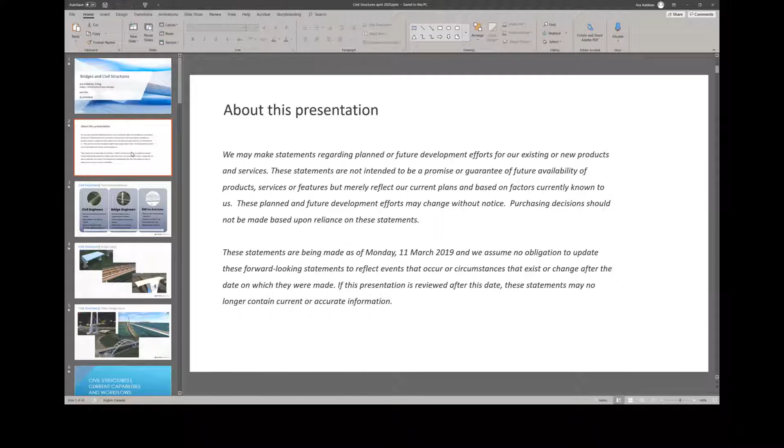Again, in summary, what is the big objective of the workflow? It's to allow civil engineers and bridge engineers and the BIM technicians to all work together. So if you have questions, feel free to ask them, and we'll try to manage our time as we go along. So I'm just going to jump in and look at this workflow in general.

Okay, and then the second video is to look at the same workflow on a slightly larger scale. And the third video is to walk through what's coming up in the August release next month, which is of particular interest on the bridge engineers' side that we see in the middle here.

Laura, before I jump in, is my audio coming out clearly enough? Yep, you sound great. Okay, so let me go in here. And just confirming that you see a video screen that says the civil structure workflow. Is that what you're seeing? No. You have to share your whole desktop instead of just the application. Okay, yeah, I just had to double check. So let me go back to share. I don't usually. Okay, now we should see it, hopefully. Yes. Perfect. Were you seeing my PowerPoint before? Yes. Okay, all right, so it was just a question of sharing the screen more generally.

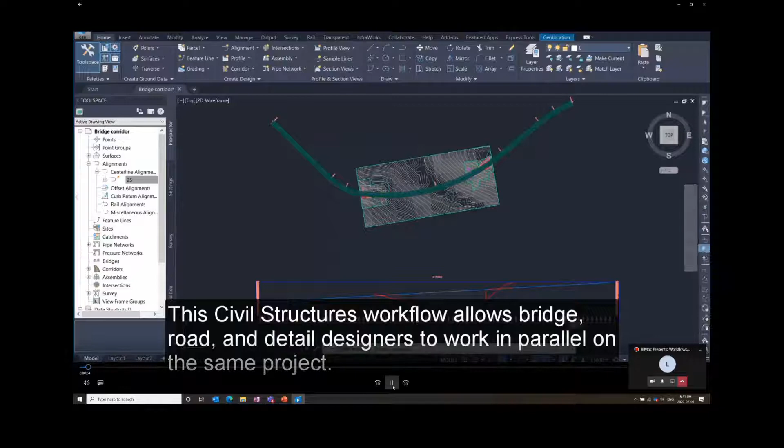So here, imagine you're working on this project and the road design team is using Civil 3D and creating, in this case, a horizontal and vertical alignment and really a corridor for this project. And now the second team gets involved, which would be the bridge design team. And in InfraWorks, you can create a site model pretty quickly using Model Builder or ArcGIS data.

So you can bring in terrain, topography, aerial imagery. You can bring in point clouds, other GIS information to provide as much context as possible for the development of the bridge design from early design towards detailed design.

So in this case, we created a starting model, and while we could also use InfraWorks to model some of the road geometry, in many cases, especially if the intent is to go to detailed design, our clients will be using Civil 3D. And we've been really working on making that integration between InfraWorks and Civil 3D much stronger. So in this case, the bridge design team is going to basically bring in the Civil 3D drawing that is going to serve as the basis for the bridge alignment.

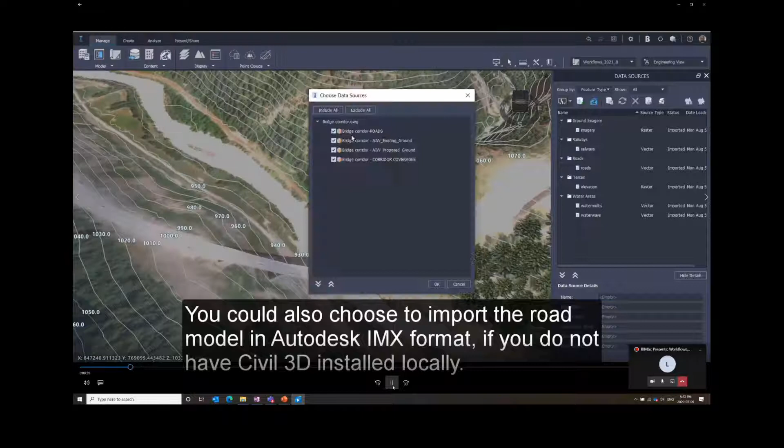So we can go in and bring a data source. InfraWorks allows quite a number of different data sources to come in, raster imagery and point clouds, etc. Now I'm bringing in the Civil 3D drawing that we saw a moment ago. And because we already have the terrain in this model, I'm just going to bring in the road design model from that drawing. And when you bring it in, you can configure it.

Now, what's new as of this April is in the past, we could bring in the alignment, vertical, horizontal. Now we can also bring in the full corridor. So if you have a complex corridor, a detailed custom super elevation, whatever the case may be, you can bring the corridor in. Now, when you bring it in, you can decide whether you want to use a corridor or simply use the horizontal vertical alignment and use a parametric road model from InfraWorks.

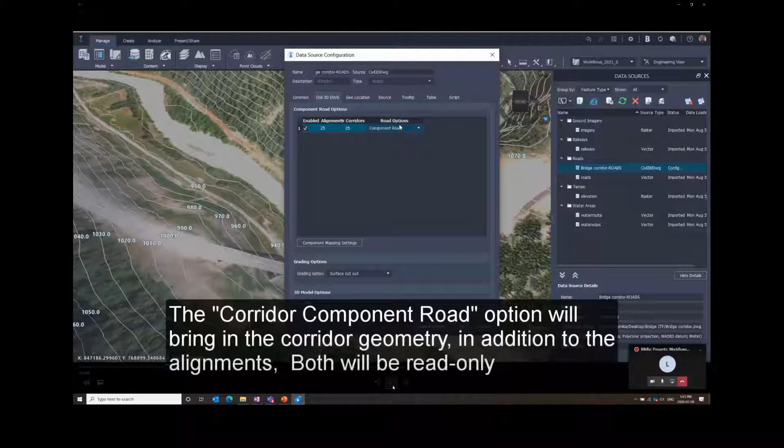So a typical scenario would be that the road design is still evolving and you're going to bring in the alignment geometry. And later on, when the road design team is further along in design, you might switch it over to the custom corridor model. So in this example, let's use the alignment and then we'll switch to a corridor later on. We've been working to make sure that it's fully compatible. I think in the August release, 95% plus of all corridor models from Civil 3D can be brought into InfraWorks.

So now this is the new starting point. The bridge design team now has this road geometry. Again, this is the horizontal vertical alignment and the parametric road from InfraWorks, which defines the lanes and shoulders, barriers, etc. And now the bridge design team can leverage InfraWorks, which is kind of in-context modeling. What that means is you can add the bridges directly to your 3D model, place the foundations and abutments based on constraints that you see, etc.

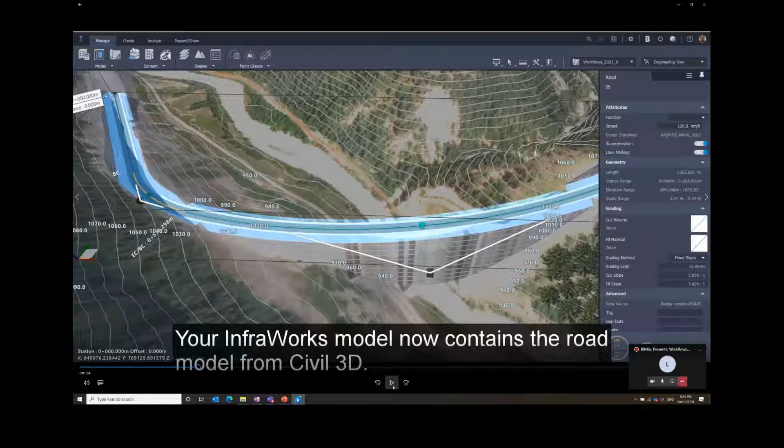In context. So to place a bridge, you would go into the bridge tool and place it anywhere along. You can be very explicit with the exact stations or approximate and modify them later. It really doesn't matter, everything being parametric. The first thing you'll notice, of course, is when you place a bridge, that a bridge is created automatically. So you don't start from scratch and model every pile and foundation and pier. You start with a default bridge and you modify it.

So in this case, I'm kind of mimicking what the Kicking Horse Bridge has. It has 5 piers. So the asset card on the right will expose a bunch of parameters, as will all the bridge components. So I'm going to change the number of piers from 11 to 5 and move on. And then we can go in and change every parameter of this bridge. Click on a pier, change its column dimensions, or click on the foundation and change its pile design, layout, etc.

What we also introduced a little while ago is the ability to right-click on the bridge and automatically create a fully formatted spreadsheet with all the bridge parameters. So especially on a complex bridge or a long bridge, you have access to all the parameters in an organized way. So in this case, a simple example is while we now have 5 piers, I might want to move them each to a very specific offset. So I want to have 70-meter initial spans, then 80-meter spans, followed by an end span of 54 meters. I could go in and click on each pier and modify them.

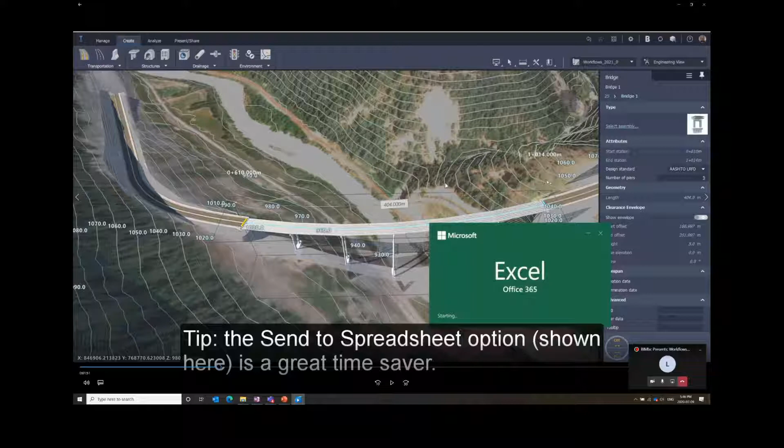But just to illustrate the spreadsheet concept, we're going to right-click on a bridge, and here you can see all the worksheets. So every pier with the same kind of Inventor model for its parametrics would be in the same worksheet. And here I'm just typing in a simple little formula to space the piers at exact stations that I want.

And you could do that for really any parameter in the bridge. Save the spreadsheet and just open the spreadsheet or update the bridge from the spreadsheet in InfraWorks. Now you'll see the 70-meter spans, et cetera, that we added. From there on, you're going to parametrically model or modify the bridge. We don't want 70-meter pre-stressed concrete girder spans.

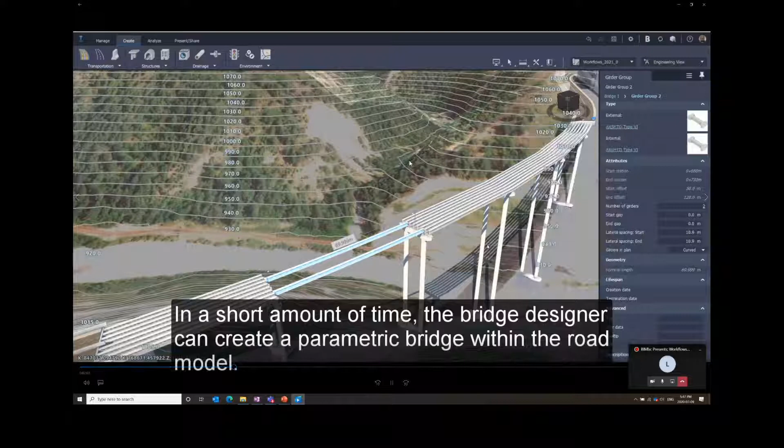So let's go in and select a span and change the number of girders, set it to be curved in plan. In this case, unlike the actual Kicking Horse, which is 6 plate girders, 4 plate girders and substringers, I'm going to go with 2 composite box girders that are curved in plan. So I'm just going to pick from the library 2 composite girders. And every one of these objects will expose their own unique parameters.

In this case, we can see when we select once more in the girder group, we could modify the top flange, bottom flange. We could also modify at any location along the span with these blue slices you see. So you have quite a bit of control, and it's almost real time. So here in a few minutes, you're modifying the superstructure, applying it to the adjacent spans, and then moving on to, let's say, the pier.

The 2-column bent of some 100 meters in height might not be appropriate. So I created a custom pier. All the parametrics leverage Inventor, Autodesk's solid modeler. That really allows us to go quite far with the parametric models in a robust way.

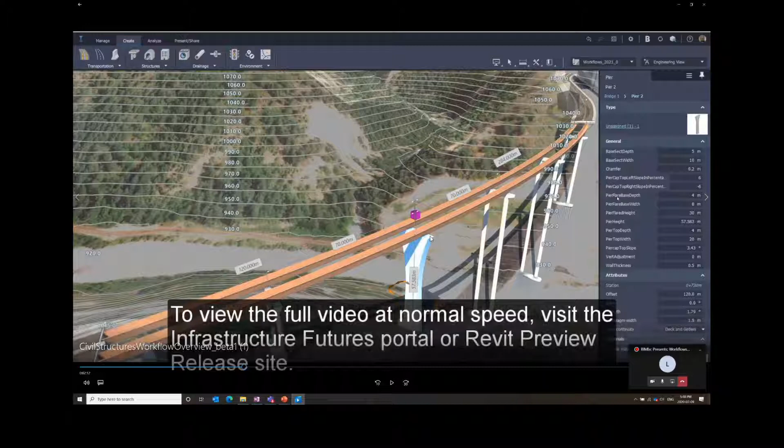So here I selected a pier which is a bit more like the actual pier, a flared pier. I can change its own parameters. Again, every component might have its own unique parameters, and quickly apply it to the adjacent piers. And in a few minutes, the bridge design team might have a starting model. And now you might do some analysis, et cetera.

When you're ready, and only when the bridge team is ready, would they want to publish this bridge. And why would you publish it? You might want to start doing all the technical documentation in Revit, adding rebar, et cetera. Or you might want to bring it back into Civil 3D to rework some of the grading or show the bridge in a long profile view. So at this stage, when the bridge design team is ready, they can publish the civil structure.

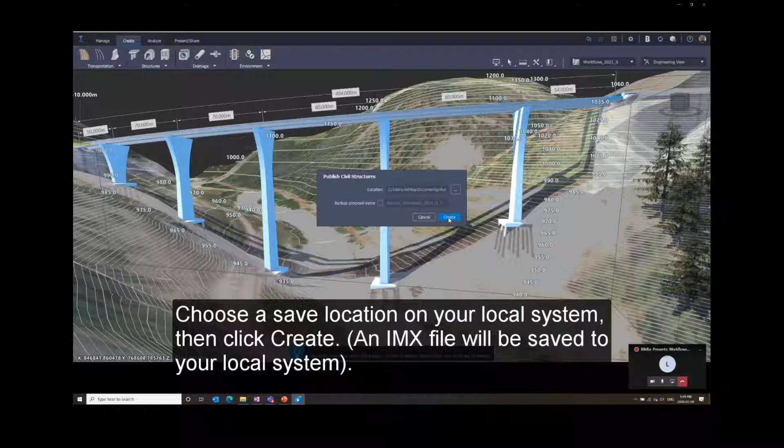And here you could publish it. You could work locally on your computer. You could publish it to your company network, your LAN, or you could publish it to Autodesk BIM 360, which is our cloud collaboration system. Any one of those approaches are available. So here I'm just going to publish it locally for this example. And once published, I can go in Civil 3D or in Revit and just open up this bridge.

So again, at the moment we have the road design team and bridge design team. Maybe we have a third team that's going to do all the detailed work in Revit, add the rebar, and do the construction sheets and schedules. To model this bridge in Revit directly, it wouldn't be that simple. In this workflow, you just create your Revit model in your normal way, pick your template the way you want it, decide whether you're using Revit collaboration, work sharing, etc., and then go in and choose to import what we just published. So we've been working very closely with the Civil 3D and Revit teams as well.

So we've introduced in the latest version of Revit a discipline called infrastructure. So this is beyond architecture and MEP. Now you have infrastructure, and we added a new set of categories for bridges. This is going to evolve with rail and other infrastructure disciplines in the near future. But in the past, if you were in Revit, you would pick the most suitable building category for your bridge. You might call a pier a column, and an abutment a wall, because you had to pick what was available in categories, Revit being category driven.

We have a question. Yes. Sorry, I didn't catch it quick enough, but the question is: is there allowance for Autodesk Fusion 360, or is it only Inventor? At the moment, it's Inventor. Fusion 360 doesn't quite have the architecture to do programmable parametrics remotely that Inventor has. Inventor has what we call Inventor Server.

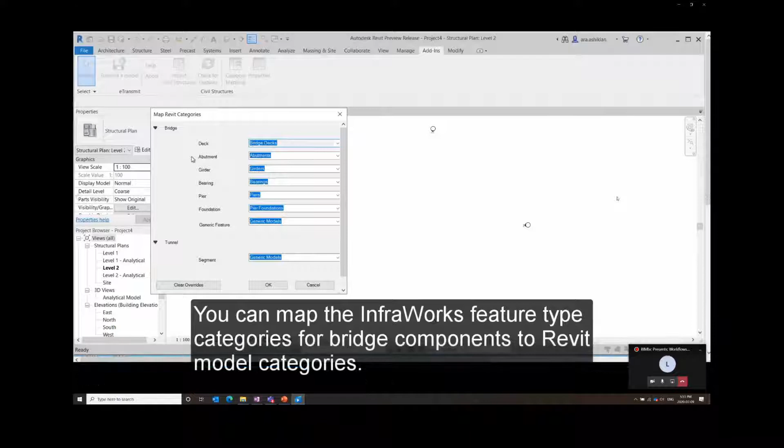Okay, thanks. So here, we'll get back to this a bit later. So you have proper categories, and we looked at IFC and Revit and came up with categories that make sense for civil structures, bridges to begin with. And when you're ready, just import what we published. We published that bridge from InfraWorks, and you just bring it in. And in a few minutes, you have the bridge.

And now, of course, you have three teams working side by side: the road team, the bridge team, and the technical documentation. In some companies, on some projects, it might be one team. In large-scale joint ventures, it might be different teams across different companies. So the workflow has to accommodate all those considerations.

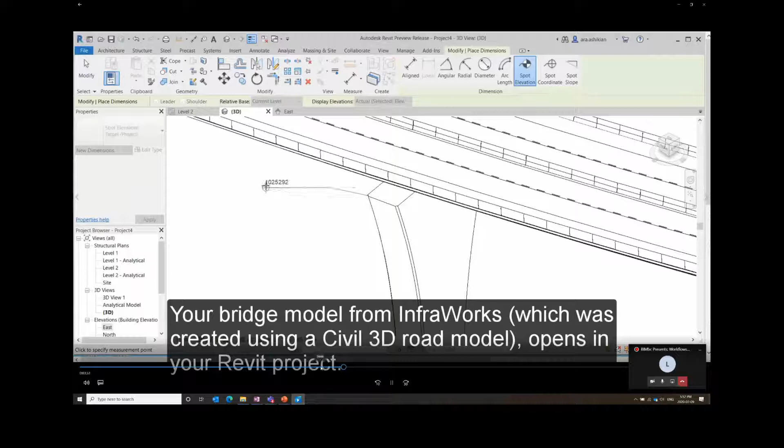So here again, you might start doing rebar and sheets and schedules. In this example, I'm just putting in some spot elevations just to get the ball rolling in Revit, and then we'll continue with kind of the cross-product workflow. So here, again, these piers are almost 100 meters tall in this bridge. It's hard to get that sense from just the graphics, but they're very tall piers.

And here we can also go, as I mentioned, directly in Civil 3D. So the road design team could bring in the published bridge directly into Civil 3D. So we can go in and import that bridge exactly in the same way, or in a similar way. So we're going in and bringing in the published bridge.

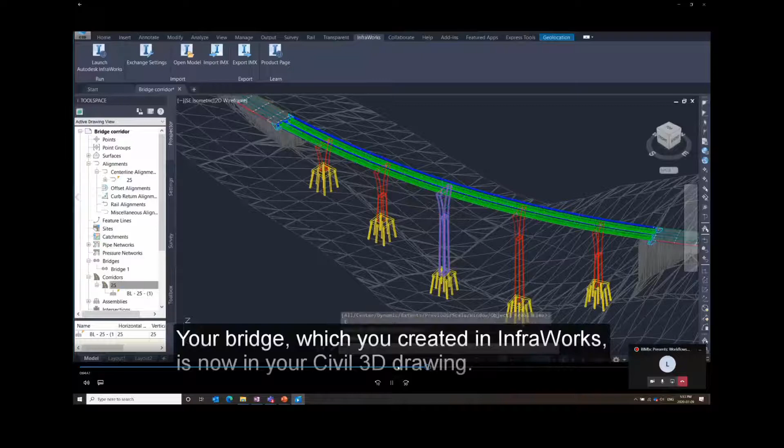And again, it's not just the fact that we bring geometry, but in both Revit and Civil 3D, all the parameters of the bridge, all the metadata is also there. In Civil 3D, they're shown as property sets, and you have access to all that information. Civil 3D now has layers and topology directly relevant for bridges. So when you click on the bridge component here, for instance, on this pier, I can go and look at the property set. These are the exact same parameters that are available for the designer in InfraWorks to manipulate. So all that information is there.

In this example, we're going to use Civil 3D's long profile view, and we added the capability to project the bridges. This is something that on the Revit side, our clients have been asking for a while. We're still working on it to do developed elevations of curved in plan bridges that are projected correctly on an elevation view. Now, in the latest version of Civil 3D with InfraWorks, when you bring in the bridge, you can just say, well, project it to Civil 3D. Now you have control over exactly which layers and styles, and all that is available here. I'm just using defaults, but it will create an elevation view with a typical annotation there automatically.

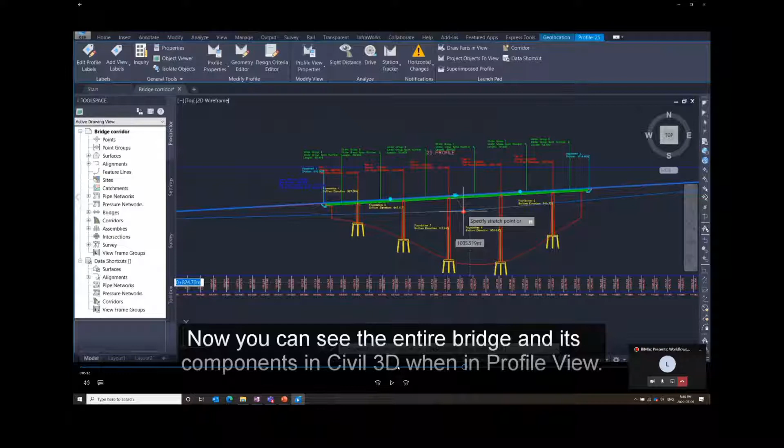And now I'm going one step further. In the real world, the road design is always evolving, the bridge design is always evolving, et cetera. So here, the road design team is already deciding to change maybe the vertical profile. I'm making a large change, like a 15-meter change in elevation, just so we see it, but really any change has to be accommodated. And we can make the change, but we don't want the bridge to automatically update, because the bridge design team has to decide how they're going to accommodate this road design change. They might decide to change pier dimensions, etc.

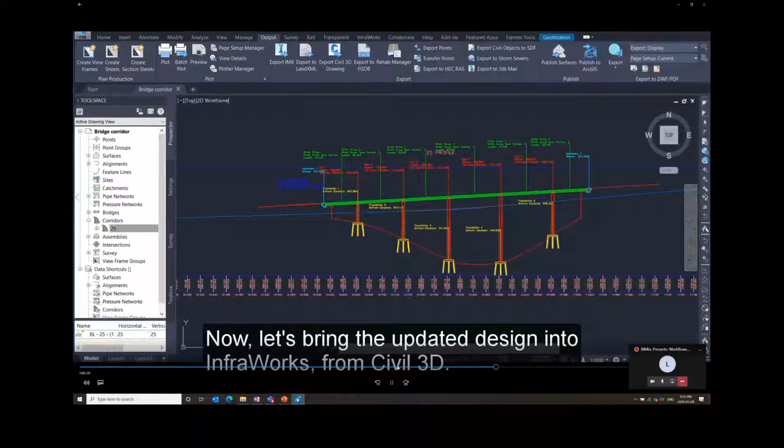So here, the road design team is making changes, and they're going to essentially publish this Civil 3D drawing. Now, you can save the Civil 3D drawing and update it from InfraWorks, or you can be a bit more explicit and just export an IMX, so you have a bit more control on this milestone. Either or. In the future, it's going to be a bit more formal with a published approach in Civil 3D as well. So here I just saved that drawing.

The bridge team might say, oh, well, we heard from the road guys that we have a new layout. So just go to the data sources and re-import. In the past, you could bring in alignments, not corridors, but you couldn't make changes to the alignment in Civil 3D. Well, you could, but it would create a new road in InfraWorks, and you would kind of orphan what you already had. So we've changed all of that. Whether it's a corridor or an alignment, you can at any time dynamically update it in InfraWorks.

So here, when I re-import this updated road drawing, notice that in the background, the road will update and the bridge will dynamically update as well. So here we're saying, well, let's use that. You can see the pier is now 80-some meters instead of 90-some meters. And again, at this stage, we don't want Revit to automatically update yet.

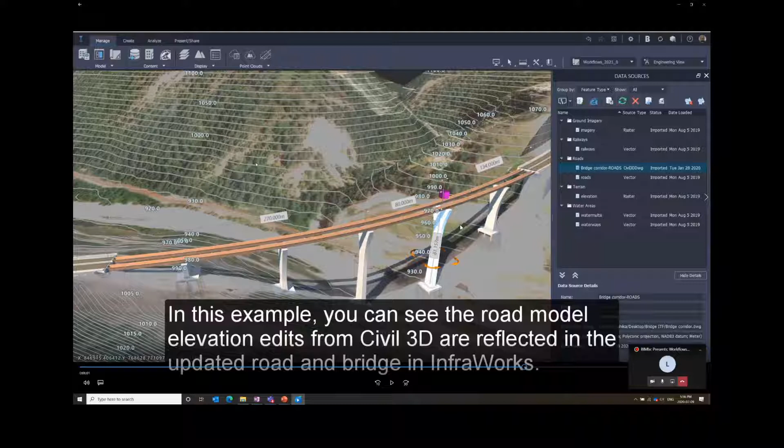We want the bridge team to decide, well, are they going to change dimensions or piers, piles, run some analysis, etc. And when they're ready, the bridge design team will publish a new version of the bridge.

Now, in this example, what if the road design team at this stage said, from now on, we have a custom corridor with custom super elevation. So you can go in and say, well, let's switch from the component road to the corridor. You can just switch at any time, and the bridge deck and bridge geometry will reflect the corridor if there are slight differences. Again, in the spirit of the three main teams collaborating and iterating at the same time.

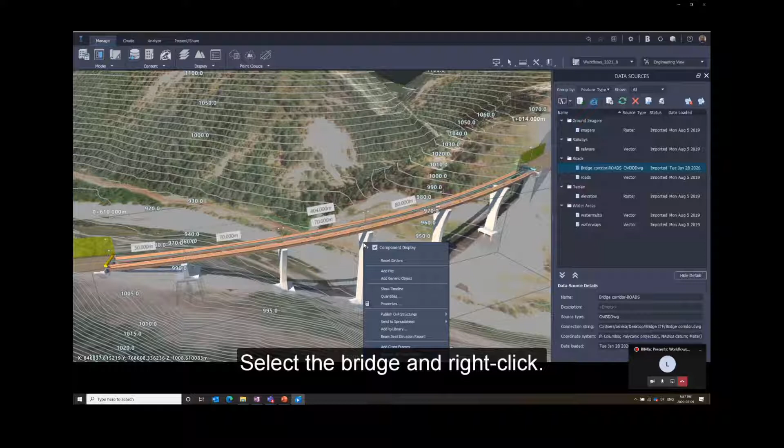When the bridge design team is ready, they will publish a new version. So here you can see publish, we update the existing version. And you can put notes, well, what did we do? What are the key changes? So our colleagues in the road and on the Revit side know exactly who did the changes, why the changes were made.

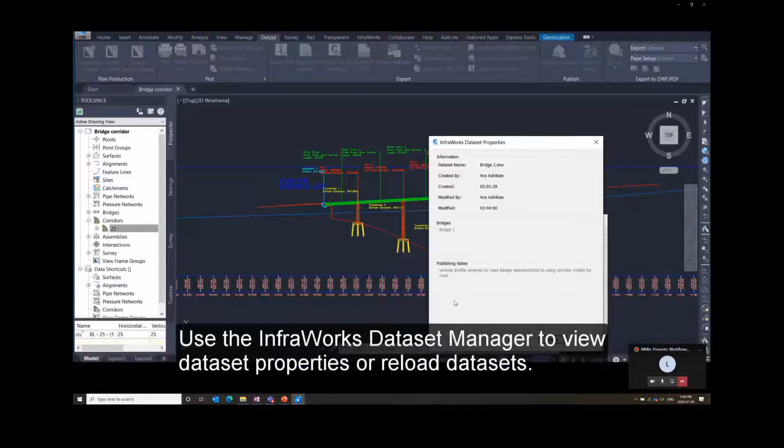And if we go to Civil 3D, for instance, you'll notice that it's going to tell you that there's changes pending from the bridge model. You can dismiss it initially or just accept it when you're ready, but when you accept it, you can see who made the changes and when these changes were made. Notice in the background, this bridge is higher than the lowered road model, but when we accept the changes, the bridge in Civil 3D will be compatible with the updated road design.

Again, we didn't have to do any rework in Civil 3D here. The geometry and the relationship is all understood. It's just a question of when do you want these changes to take effect, so you have control on that. So the geometry is updated and the profiles are updated.

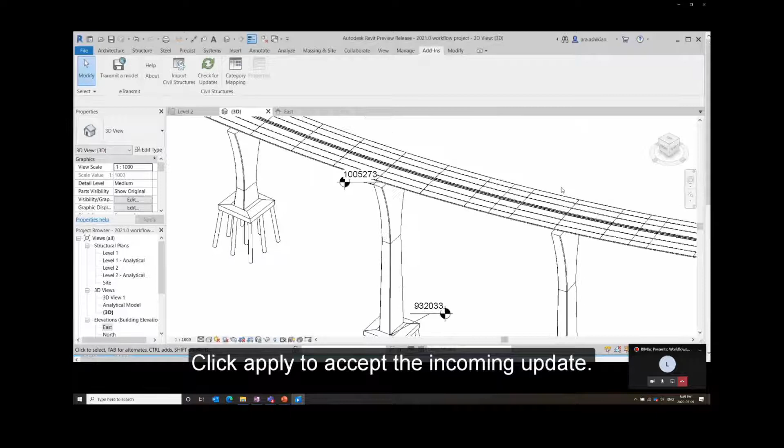In Revit, you get the same notification. If you're in Revit at the moment, you'll get it, or the next time you open Revit, you'll get a notification such as this one. And when you accept the changes, the geometry in Revit will update. And the derivatives, in this case the annotations, will be maintained, but just updated with updated numbers.

The reason this works, of course, is Revit topology or the geometry has faces and so on. So rebar has a relationship to some faces. As long as you're maintaining that same topology, just changing dimensions, making the pier flare wider or thicker, etc., Revit has a chance to keep all of those GUIDs intact and dimensioning and rebar intact.

If you were to change the pier to column bent, then you would lose associated dimensioning that you put in there. But as you evolve the design towards detailed design, you'll typically start changing dimensions and not wholesale changes. Nothing prevents you even today from changing number of piers and so on. You might have to do a bit more annotation in Revit. All the properties are, again, in Revit, the quantities and so on.

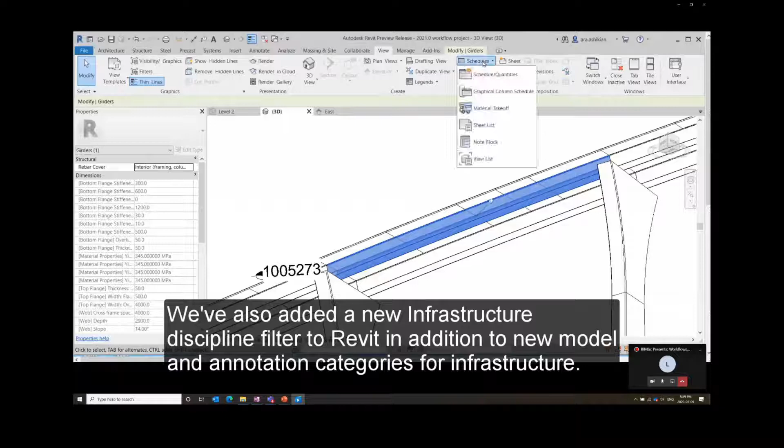And now because we have categories and the infrastructure discipline, here we can see this new discipline that I was talking about. This is new as of the latest version of Revit. And with the bridge categories, we can go in and schedule really anything out of this bridge. Here I'm just scheduling girders, but you'll see later a lot more detail coming in the bridge models. All of this can be scheduled. So detailed tables of quantities, much more fine-grained than you could do in InfraWorks.

So again, this is the overview of how road design, bridge design, and documentation can work together on the same project. The data can be updated when desired. And so that's the introduction of that workflow.

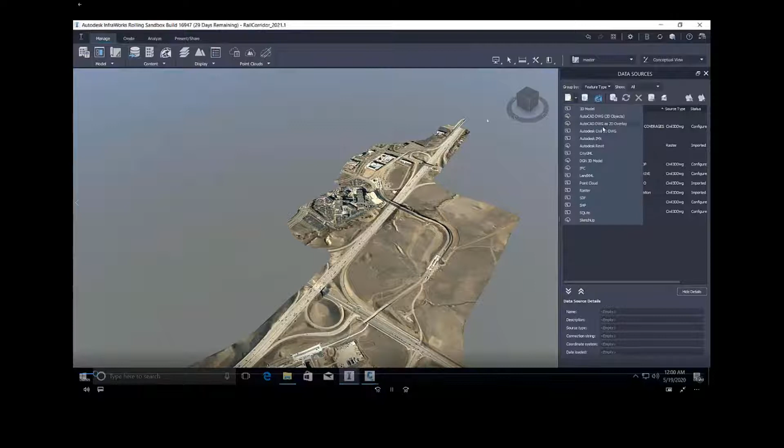Now I'm going to jump into the same workflow, slightly more complex project, just to illustrate. Oops. No, that's not. Yeah, just 1 second. I think I have a different. Not too many videos here. All right, let's jump into this one here.

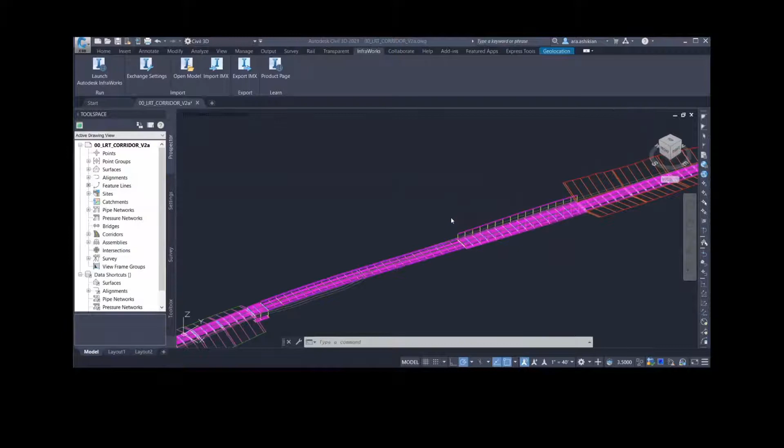Okay, so here is a more complex example of a corridor in Civil 3D, which is for a rail project, in this case maybe a light rail. We're starting with a detailed corridor from Civil 3D, and if we look at it, this corridor has areas for platforms and grading, etc. And this is going to be our new starting point for this rail design. So just to illustrate where this example is, I'm going into Google so that we can see this actual project.

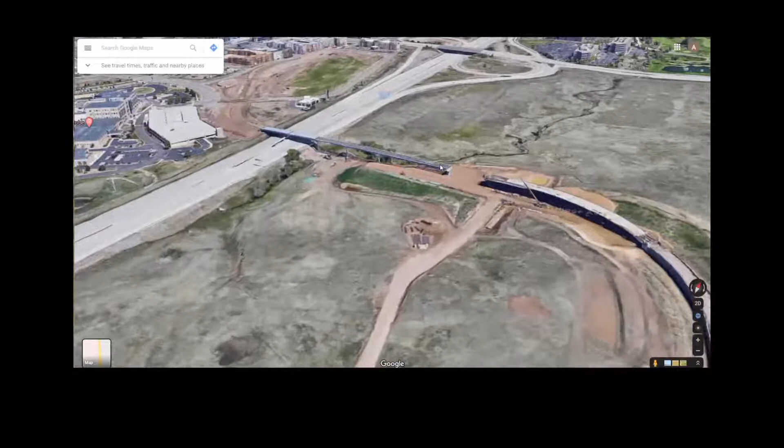This is just an internal case study, just to say, well, what if we had modeled this using this workflow? And this part of the video is just showing that project in Google Maps. So you can see here the alignment, and you can see one of the bridges under construction over here. So we want to bring this corridor into InfraWorks now.

So we could again model this whole corridor alignment directly in InfraWorks, but if you want the precision and you want to iterate towards detailed design, let's bring in the corridor. And when we bring in the corridor from Civil 3D, we'll use it directly in this case. Again, when you bring it in, you can bring in and configure all the sub-assemblies, exactly how they're going to look, and all the metadata of the sub-assemblies is going to be exposed in InfraWorks as well in the August release that is coming out.

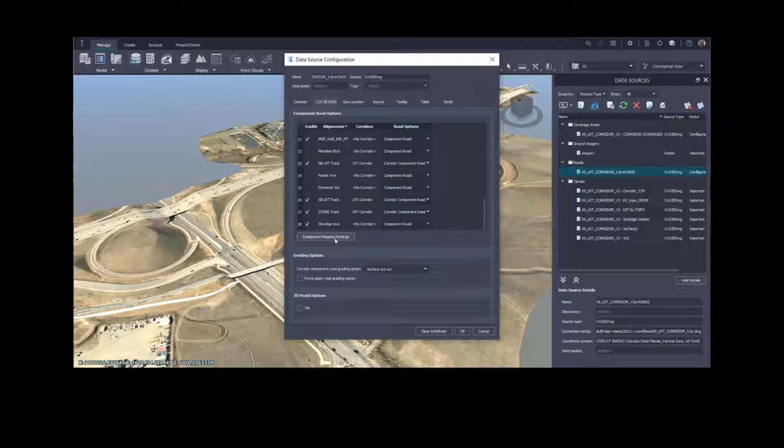So here, when we bring it in, you can decide which aspects of the drawing you bring in, and then when you configure it, you'll see here that you have many roads in this Civil 3D drawing. So I'm just going to turn off those I'm not interested in. Some of them are just minor roads, and you can see all the main geometry has a corridor attached to it, so we're just going to use that. We could again go in and configure all the sub-assembly visuals. I'm just going to use defaults here, but it could be quite detailed.

And when you're ready, essentially this brings the whole Civil 3D corridor to life in InfraWorks. So it's as simple as just saying, open that IMX or drawing and bring it in. So now we have the corridor directly in the InfraWorks model. And we'll just do a fly through of this corridor. You can see some areas have retaining walls, and some of it has dual rail tracks and some platform areas. So that's the starting point for the bridge team.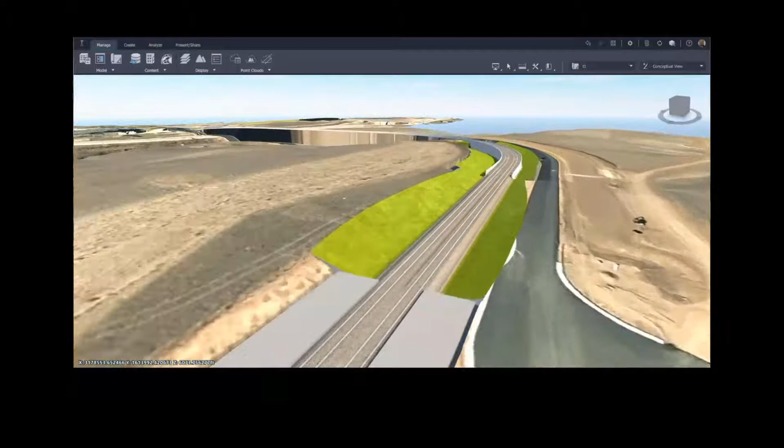Now, to model the bridge in InfraWorks is far more effective than trying to do it with assemblies or sub-assemblies in Civil 3D. So we're leveraging the strength of Civil 3D. The rail or road design team is providing this as a starting point, and then the bridge design team is going to augment it with the bridges and tunnels in here, and then furthermore leverage all the Revit detailing and documentation aspects. In large projects, it might be 3 different teams, as I said. In small projects, it might be the same.

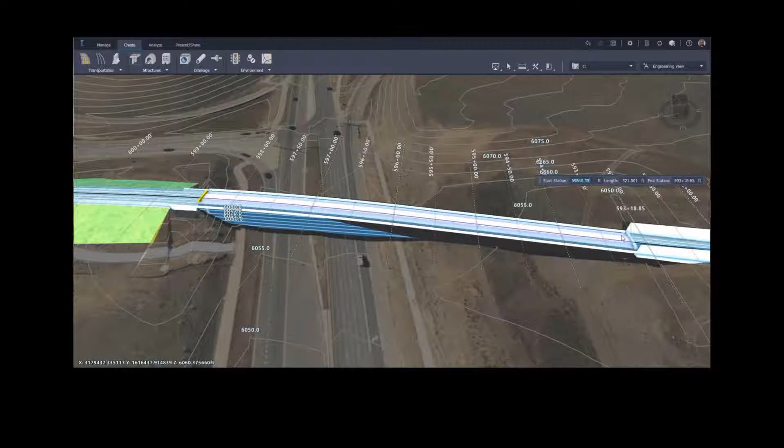So you can see there's regions along the corridor that are meant for bridges, and InfraWorks recognizes that from the corridor, and then it goes back to grade, etc. So let's just jump ahead here. So here's an example. In this location, we want to place a bridge. I'm just going into different views so we see contours. And it works the same way when you start with a corridor. I'm going to place the civil structures bridge or tunnel, in this case a bridge. And when you hover over it, it snaps to the beginning of that region of the corridor. So it's going to snap, okay. And then it's going to place the default bridge like we did before, and we'll change it.

So here I'm trying to reflect from Google Earth the bridge had 3 piers. I'm just making changes parametrically to mimic that, and we'll move in context the pier location to reflect the aerial imagery, so I could move and skew the pier. So this is typical application. So I'm going to skew these piers to reflect the orientation of the road that we're crossing, move it in place. As we do this, all the girders and bearings, et cetera, will dynamically update.

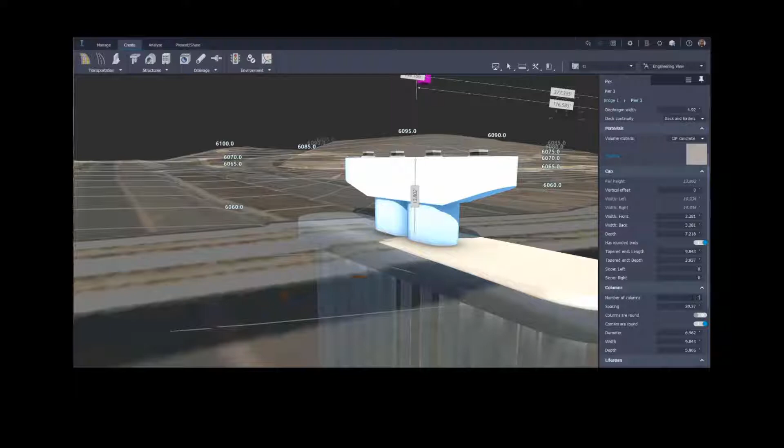And we can go and change the dimensions of this pier to reflect what we're looking for. Again, each of the components that is in the library exposes its own parameters, and you can create your own very easily and add it to your own libraries. We'll see later that you can go beyond the components and add the bridges to your libraries. So here we have this pre-stressed concrete girder rail bridge.

And what we're going to do now is, the other thing that we focused on is integrated analysis. So for the bridge design team, as you're laying out the bridge, you might say, well, let's do an analysis model. So we used to have the continuous beam model called line girder, where it would look at all the span geometry and create a continuous beam model using all the sectional properties of the girders and deck, and do live loading, surface influence lines, and so on, and carry out moment shear diagrams and do code design checks along the way.

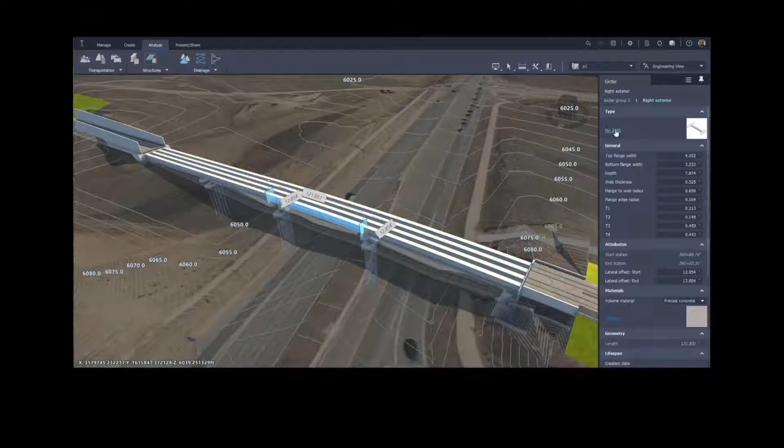When you have skewed bridges or curved bridges, a continuous beam model is not always sufficient. So we've been working on what we're calling refined analysis. The first type of refined analysis is a grillage. This is typically that next level of analysis. The grillage will model the deck and all its girders with the proper skews and offsets. When you use a continuous beam model, you're using lateral distribution factors from code.

So here, again, this is at a glance. You can quickly say, okay, let's create a full grillage model. We can look at it in the preview here, and it will create a whole report on every single section property that was computed, all the geometry, all the node locations, all of that is very transparent. So you can just go in and say, well, let's look at how it translated from the rich BIM model of the bridge to analytical simplification.

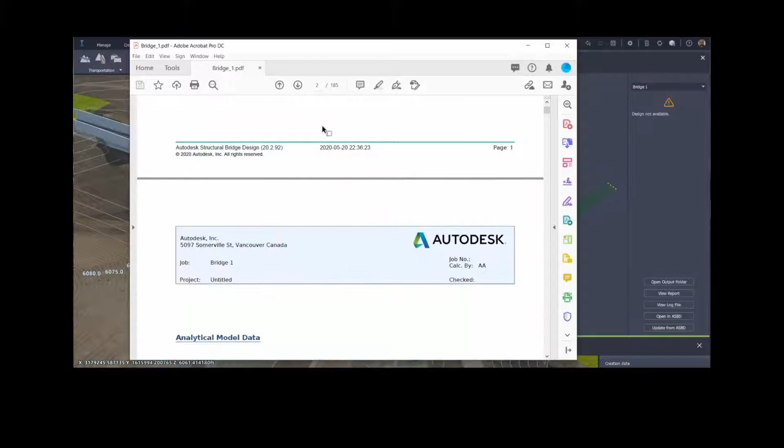So here you could go in and we'll show you all that information there. And you also have access to all that information if you want to bring it into some other software. So you can see the section properties and all the coordinates. But you can also open it up in Structural Bridge Design, which is included in the AEC collection. This is particularly well suited for girder bridges. It's been around the market for a long time. Autodesk acquired it 6 or 7 years ago. It's kind of the reference implementation.

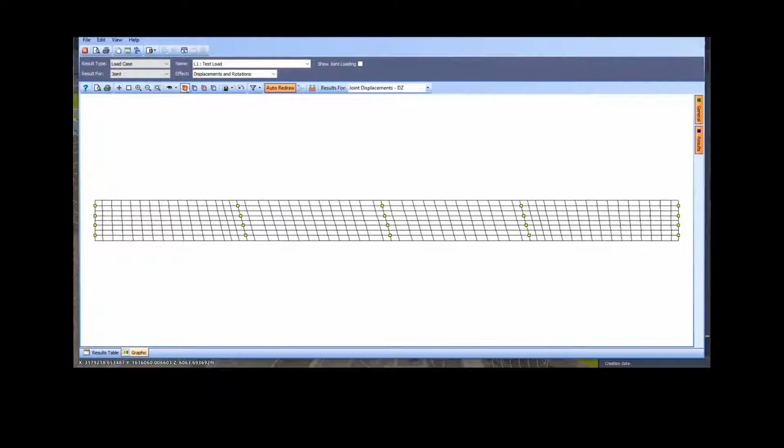So when you have this grillage, you can just open it up directly in Structural Bridge Design, modify it if you need to, but really quickly have access to all the analysis results on a more complex bridge like this, moment and shear diagrams, et cetera. This is all available very quickly as you're laying out your bridge. That relationship between your choice of analysis model and the bridge is there.

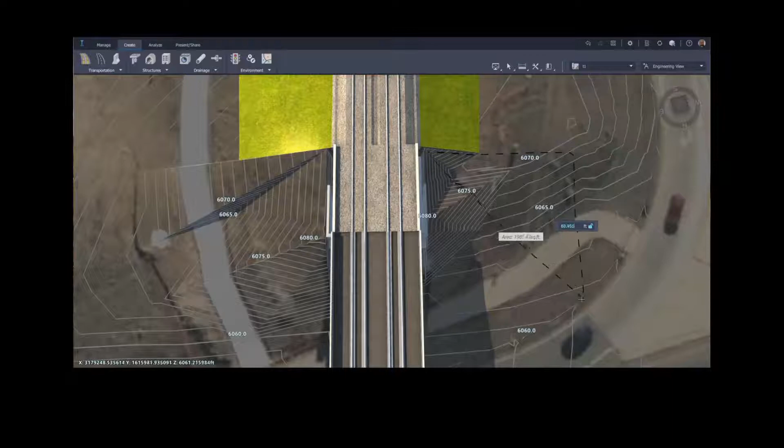In this part of the example, I wanted to show a couple of other things here. The corridor has some grading, but what if you wanted to have a more complex grading? You can leverage this tool called land areas that allows you to modify the grading directly in InfraWorks. This has been in preview for a while. We're adding it formally to the product. It's going to be called grading areas instead of land areas. So in this case, it's slightly contrived, but I want to change the grading around this abutment and replace the simple Civil 3D subassembly with walls with a much more complex MSE parametric model.

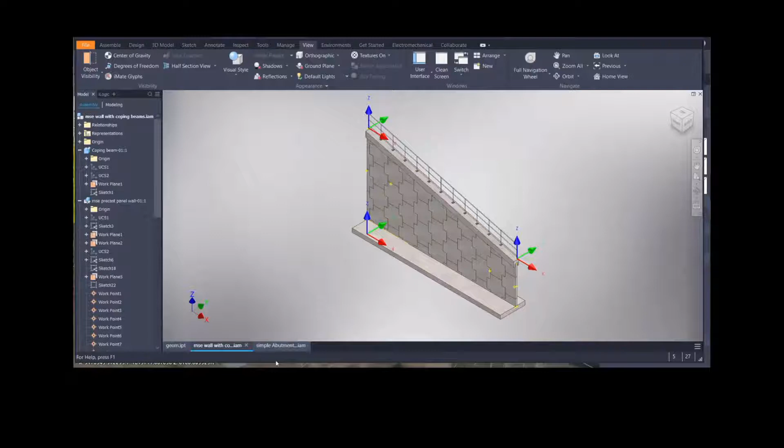So here, this grading tool allows us to modify the terrain either per vertex or the whole thing. So quite flexible. You can control the gradation and the steepness of that. But here I'm just creating space. I want to take this simple abutment that we have here with wing walls, and I created in Inventor an MSE wall that has parametrically all the coping beam and railing, if you change the dimensions, all of it. But I also took those and created a custom, kind of a work in progress, MSE-based abutment.

I'm going to just go in and replace that in the same way that we placed piers in the first model. Everything can be swapped out here. I'm going to place the MSE wall and change its parameters. And also you can add content directly to the terrain, walls or construction equipment. We call them generic objects. They're basically three-dimensional Inventor objects that you can place anywhere. Here I'm just going to put the standalone MSE wall, and I just want to cap off that grading. Again, I'm not saying it's super realistic, but just showing the workflow here.

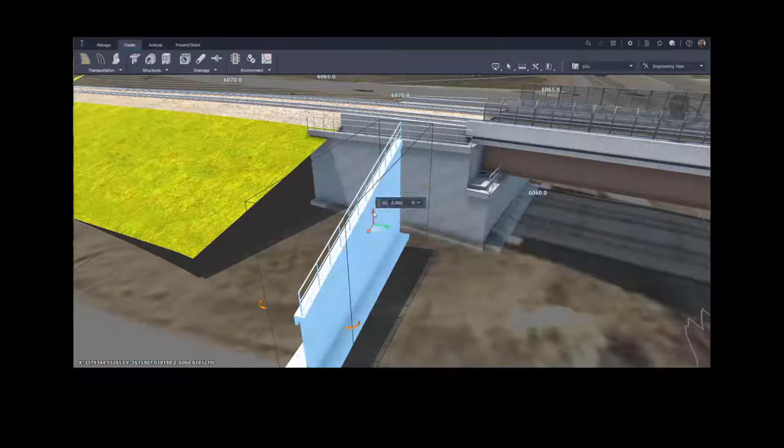So as a terrain-based object, you can control its location, its orientation, change its parameters. So again, you're interacting with the model directly. That's a key thing. And if you want custom content that's not in the library, you can definitely create your own. So here I'm just going to tuck it into the side of the grading and change some of the parameters so the slope reflects the grading slope. And really, in a few minutes, you have something slightly more suitable, maybe, as an example.

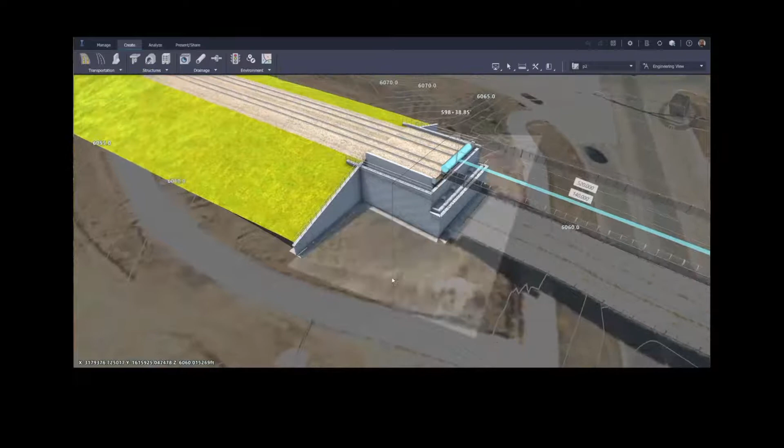But the next part that we've been working on, what I'm showing with the grillage analysis and what's coming up next with the cross frames, is what's coming out in the August release, so 3-4 weeks from now. Here you can see I forgot to toggle off the railing. Of course, we don't want railing right in front of the bearings and girders. But now the next area of focus is level of detail of the bridge. It used to be bearings were nominal.

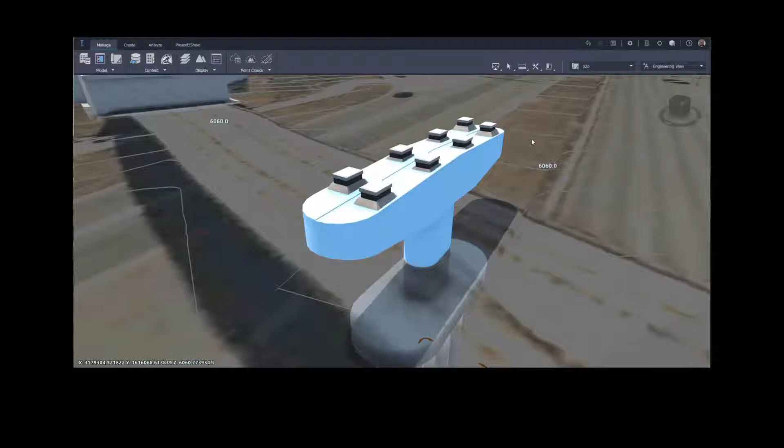Now you can create your own Inventor-based bearings, and it understands the relationship between the pier and the girders. If you say the girders are simply supported, it will update. If you change the geometry of the pier cap, the sole plates and masonry plates, etc., will adjust.

Here I'm going to switch to another type of bearing altogether, and it will have its own parameters. So this has kind of a pedestal with anchorages and so on, anchor bolts. And I'm going to flex its parameters, maybe make it slightly larger. So again, we're increasing the level of detail of bridges, starting with bearings and then the steel framing, cross frames, and diaphragms.

So you can quickly change it and then apply it to the other bearings at this pier or all piers. So in the same way that you can change one pier or all piers, or you can open it up in a spreadsheet and have even more control en masse. I'm going to switch the pier to a different type of hammerhead as an example. So here, in almost real time, you've tweaked the layout and you're going to assign it to the other piers.

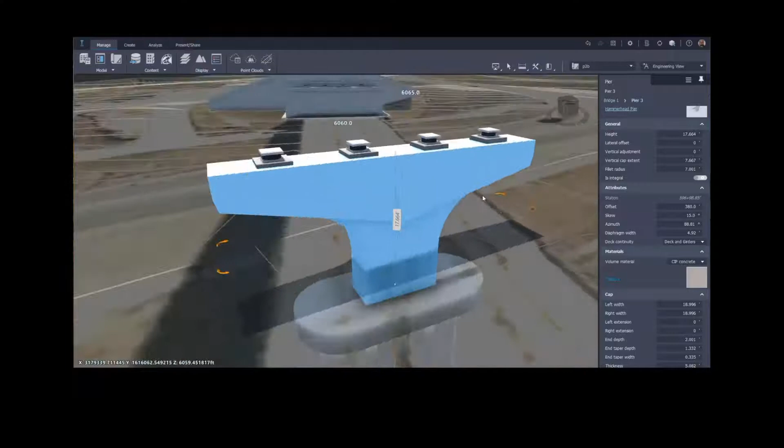Now we're going to go and switch the superstructure from the concrete to steel girders. And now we're going to start applying the cross frames. So this is a new level of detail that's coming out next month. The cross frames are relatively complex Inventor objects that have real geometry, real eccentricities and gusset plates and so on. But as a designer, you just worry about what's their spacing, what's the relationship to the pier. If you move the pier, skew the pier, they adjust.

Are the cross frames going to be staggered? Are they going to be skewed or not? You just work on the high level. Is it going to be V bracing, X bracing, Z bracing, single angles or double angles? Those are the kind of metrics that you would interact with. InfraWorks will place these very precisely based on the girder geometry.

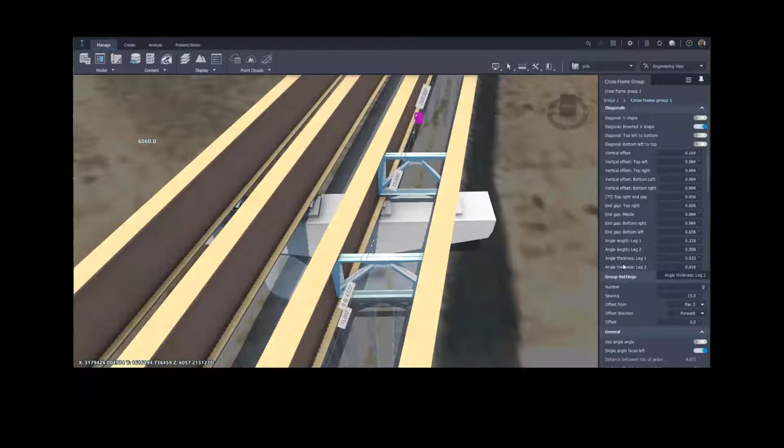If you change a girder geometry, change the depth of the girders or flange dimensions, all of these will dynamically update. So there's a really tight relationship between the superstructure and these cross frames or steel diaphragms. They expose many parameters. You can have external stiffeners or not, etc. So you have quite a bit of control, and you can create your own with different layouts of diaphragms and cross frames. But again, a lot of effort was done so that you might configure a bay of cross frames, but you want to quickly assign it to the adjacent bays.

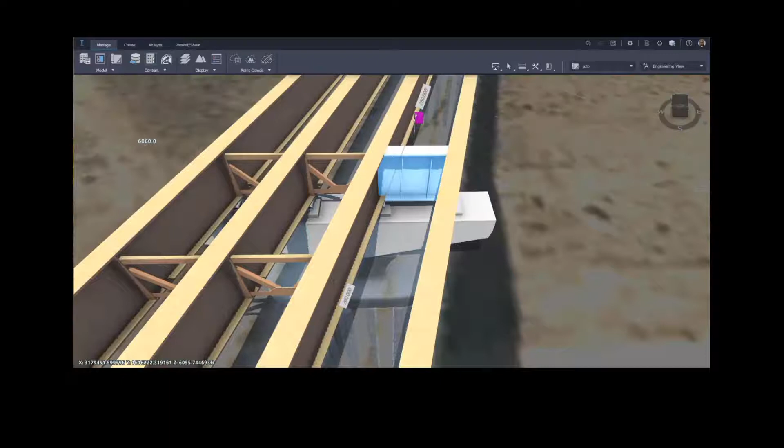This means that in early design, what you would normally in the past have left off for final design or detailed design is now available up front. That means quantities, and that means plans and elevations can have all this information. So instead of prorating your girder quantities, let's say 25% added to it for framing and cross frames and stiffeners, it can be very explicit now.

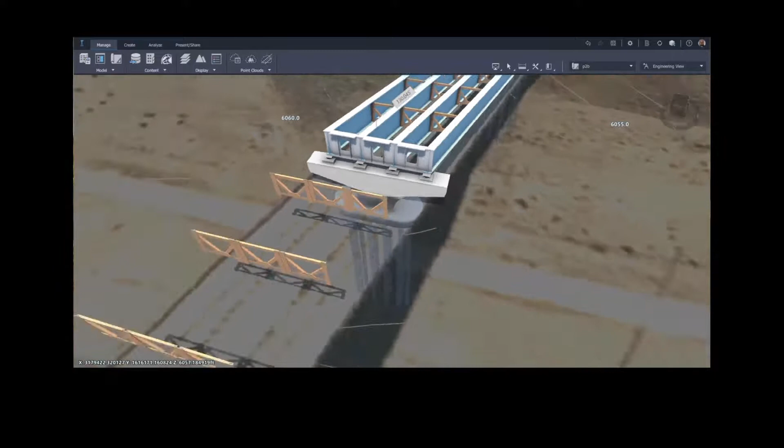But it goes beyond that. So here I'm modifying the cross frames over the pier with one which is a diaphragm type. So again, the idea is that you should be able to manipulate your parameters of the bridge and get to this level of detail in the August release. And when you're looking at this, you want to be able to, even in InfraWorks, get a sense of the quantities, so bare girders or cross frames. So that's available now.

So here, let's go in, and in InfraWorks, the quantities are kind of high level macro quantities. In Revit, with schedules, you can get into very fine grained tables of quantities. So here, I'm just going to go into the quantities and see how much concrete or steel, how much precast versus cast in place do I have for the structure, for the superstructure, for the substructure, or for a selected element.

So here, if I select this girder group, I can see I have 141 metric tons of steel. If I select one individual girder, it's 35. If I select the cross frame set, I have 10 metric tons, etc. So all that information is pulled out behind the scenes very precisely from the Inventor model.

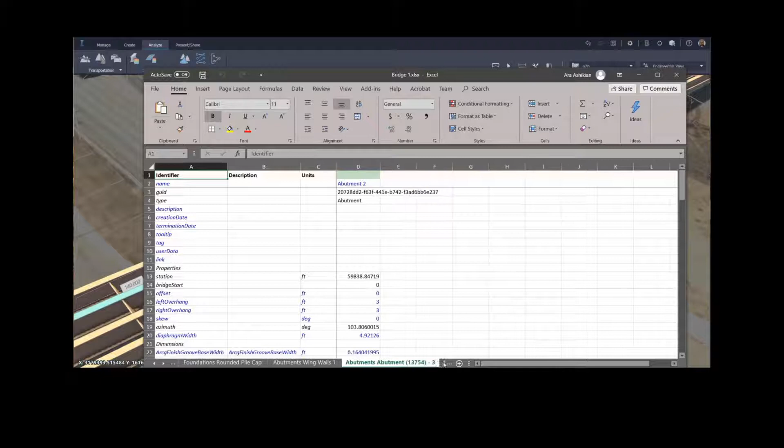And again, you could open this whole thing up in a spreadsheet. And in this case, you'd have a worksheet with all the cross frames as an example. You might decide to go there and make some adjustments at that level. So there could be quite a few parameters that you could access in this approach.

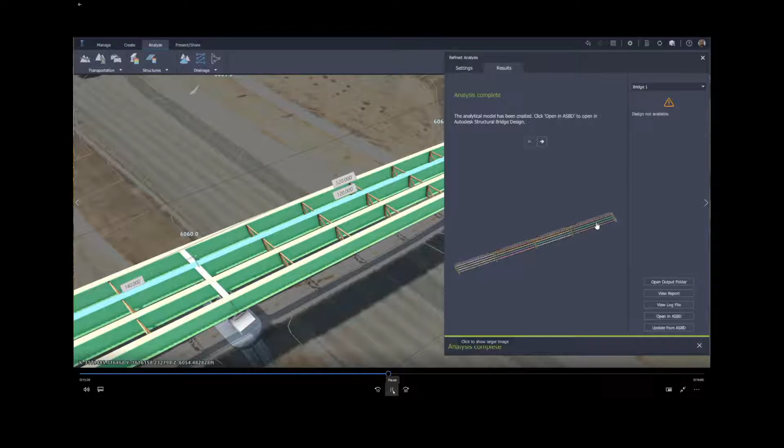Now, let's go into another type of refined analysis, which is an offset girder. So it's kind of like a grillage, but the girders are centroidally offset from the deck. So it's just a bridge engineer choice. How do you want to discretize that? But again, when you go to Structural Bridge Design, you very quickly have access to this rich model that has the grillage and the girders that are centroidally offset. You can get moment and shear diagrams, etc., very quickly.

Now, let's say we've configured this bridge and we've added the bearings and so on. Now we could save this to a library of bridges. So maybe in your own company, you're going to create not only content, but save this bridge to, I don't know, typical BC MOT steel bridges and save it to your own library.

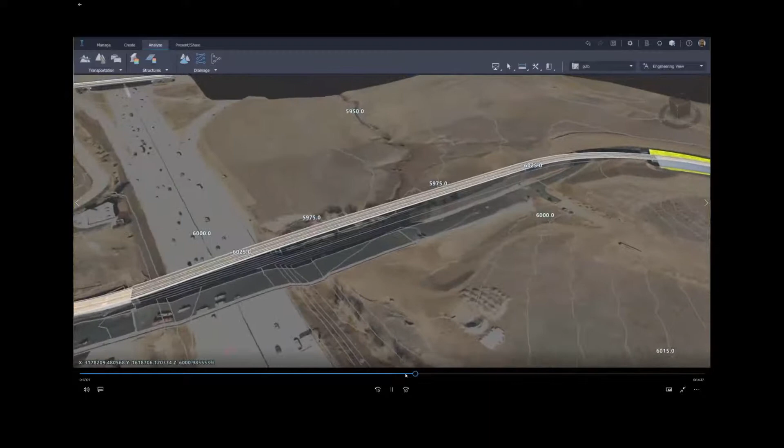And the next time, we're going to fly over to the other location, which has a longer bridge, 10 span or 12 span bridge, I can't remember. So again, we'll place the bridge here in that corridor region that is available for us to place a bridge or tunnel. So I'm going to go in and place that bridge. But instead of configuring and modifying all these piers and girders, I'm going to just make sure that we have the right number of girders and the piers are where I want them. And then I'm just going to reuse that bridge template that we saved. So your starting point is much further ahead.

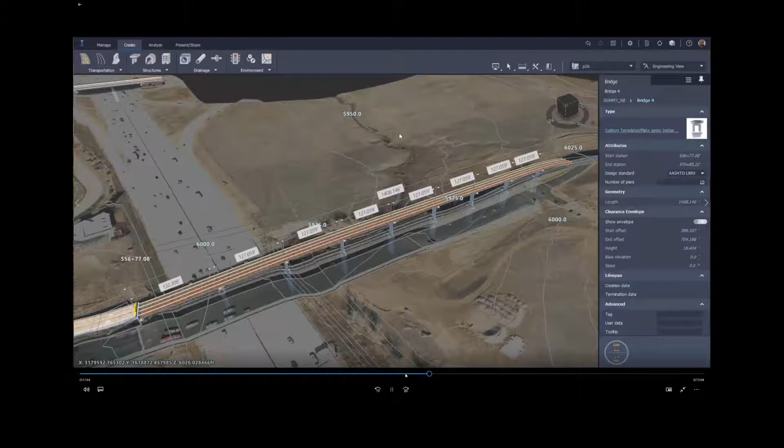So here I'm just going to the template. We just changed the number of piers to 10, and then I'm going to use a template. And it's going to update parametrically. If we zoom in, you'll see that all these components have been swapped out to what that bridge template had. Again, it's not that it takes a lot of time to model these, but it's a question of being very organized with your content of parts, of bridges.

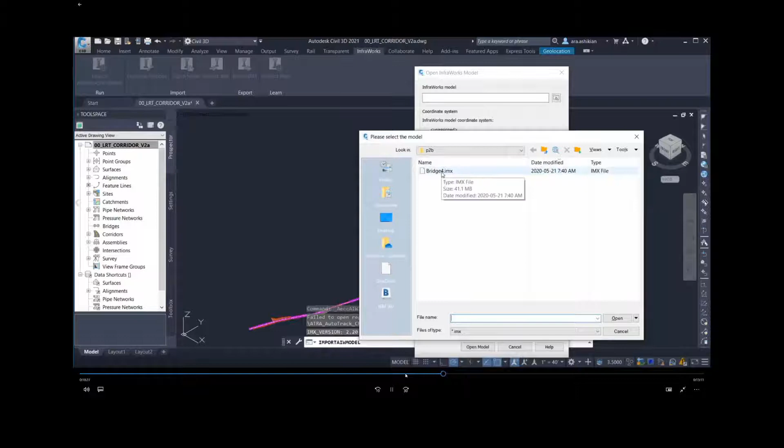And again, we could publish this bigger bridge like we did in the first video. The workflow to bring it into Civil 3D or Revit doesn't really care if it's big or small, simple or complex. And it's going to be geolocated precisely, compatible with the corridor, the coordinates between the three products will be consistent, etc. So here we just brought in this bridge in the original corridor model in Civil 3D. When we zoom in, you can see, oh, now this bridge is right there.

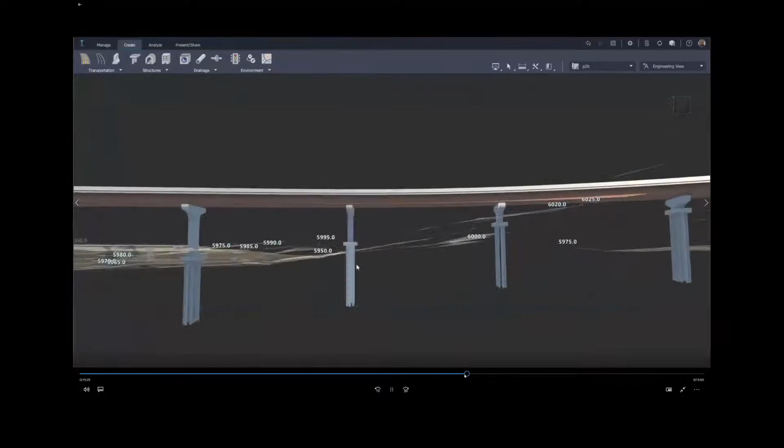And because it's curved in plan, we might want to leverage the Civil 3D profile view again, so you can see here all the parameters. So we're going to go in and just add this to the profile view like we did before. And again, it's going to do all this annotation here. When we expand, you can see that it knows it has 10 piers, and each one of these we can configure what we want to show, etc. But we just basically apply this, and now we have all the components of the bridge shown in Civil 3D, including the abutments.

Now, in the first video, we were looking at how the road design team changes the alignment. In this case, it's the bridge design team that's changing the bridge design. And so we move a pier and maybe change the length of piles on this one pier. Well, you can make many changes. It really doesn't matter. In this example, we're just showing, okay, let's reduce the length of the piles to 30 feet and then publish an update. So the changes can come from Civil 3D or from InfraWorks.

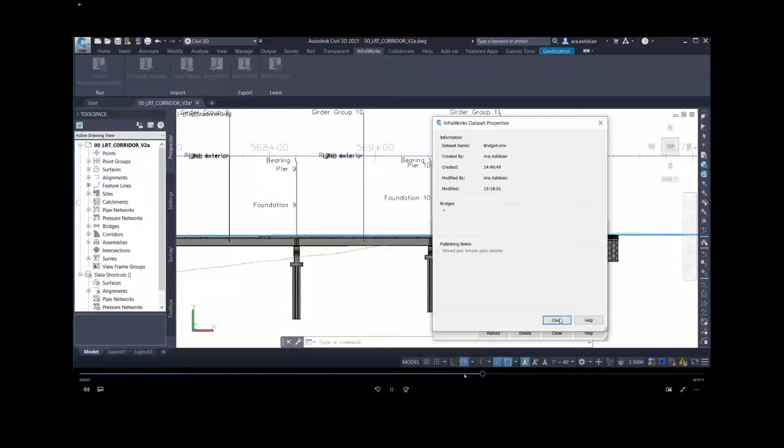So here we have a new version. Again, the notification that the bridge has changed. And when we update, we can see who made the changes, etc. And when we update the Civil 3D or the Revit, the geometry updates. In this case, the derived profile view also updates. You can see here that pier and the foundation is a bit different. The pile length is a bit different.

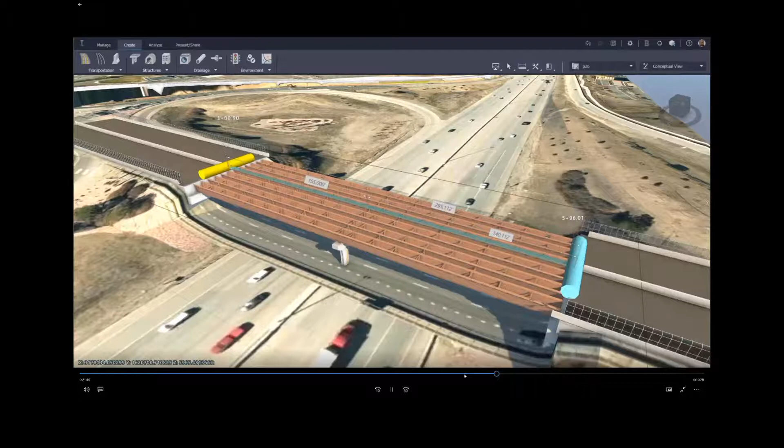The last part of this video goes into more of a road bridge. So let's have a quick look at that. So here I just went to Google Street View and try to mimic what they had, although I chose a different type of architectural pier that I had in my collection. Here we have composite box girders. The crossbeams that we saw before can also be applied as internal and external bracing. All of that is understood. Here you can see a more elaborate pier model from Inventor.

And we're going to do, in this case, a continuous line girder that we spoke of, which is just a simple continuous beam model, and use code-based distribution factors to get moment and shears. But this goes beyond just creating an analysis model. It actually creates the influence surfaces and the diagrams for moment and shear, and checks strength and stability all along the span.

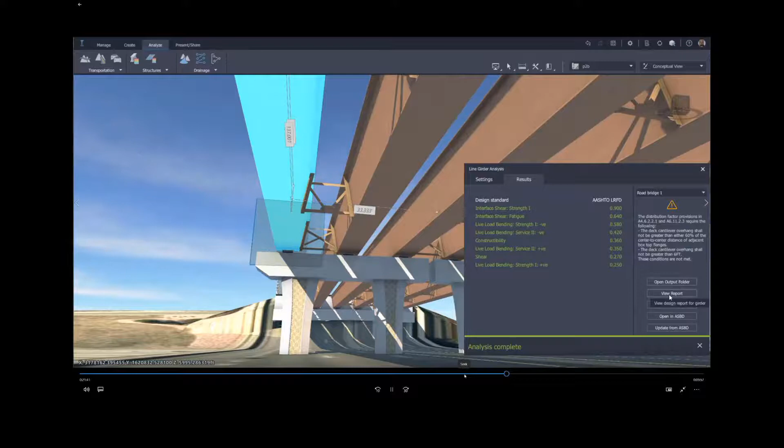So it will tell you at a glance where you are, but you can open up the analysis model like we did before, or view a full report of the calculations. Again, as you're iterating on your design, all of this is available in front of you. So it's a very detailed breakdown of strength and stability, the envelopes, all of that is available in the report. Again, this is the simpler continuous beam model.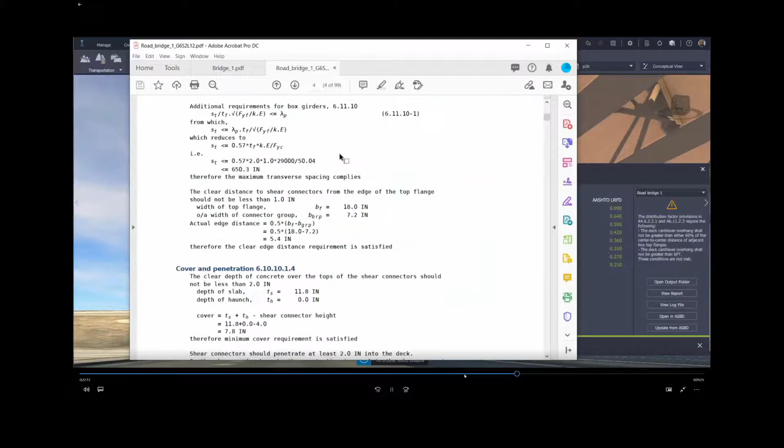For these bridges, if you have heavy skews or curvature, you'll typically have to go on this steel bridge to a finite element model, and those can take many days to create and calibrate. Now with this workflow, because the rich geometry of the BIM model in InfraWorks is there, we can go to the FE model directly, right? Again, this is something for detailed design in the past. It's going to be available for early design, fully calibrated.

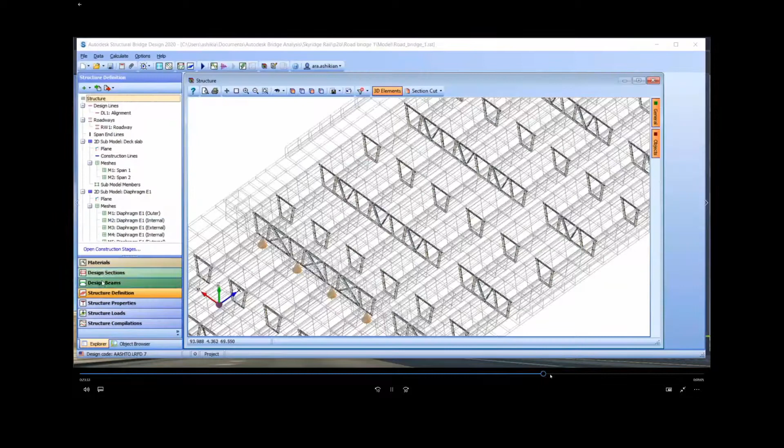So you can control some of the settings, the mesh densities, and so on, but it will look at all the girders, even if you have a different number of girders, or even if they're not parallel, even if it's heavy skews, it will look at all the geometry and do all the meshing. Here you can see cracked properties over the piers, etc., reflected in different colors, and you can go directly into the analytical model here, look at how it's created, and go into the ASBD and look at analysis results. What's coming up next is we're going to tie in all the design checks that we see for the continuous beam model to these advanced grillage, offset girder, and FE models.

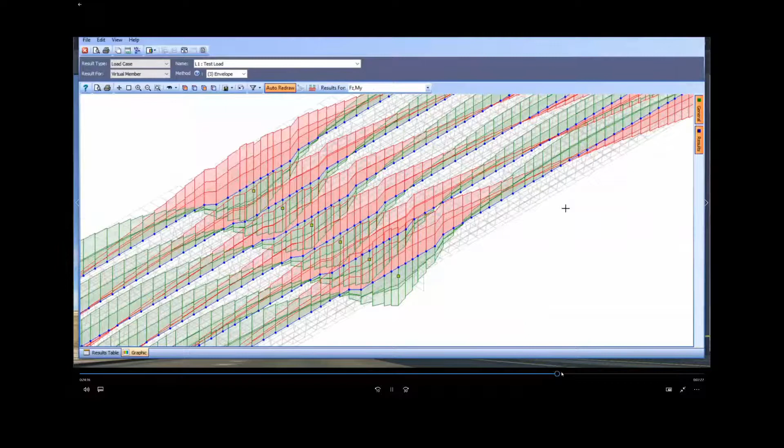So this allows you, in early design, to say, well, I wonder if it's more efficient to have 5 plate girders or 3 composite box girders. Is it more efficient to have variable depth girders or prismatic girders, et cetera? What's the influence of heavy skews at the abutments? What penalty am I paying for that? Because it's all integrated, you can experiment at that level. And when you're ready, just publish this and go into Revit.

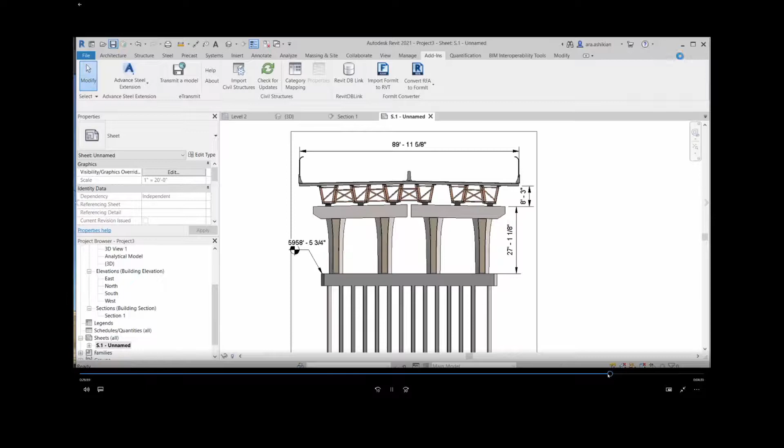And here you can see a much more detailed Revit model. All the information still came across. Again, it doesn't care about the level of complexity. And you can put a section view and start annotating the elevation view of the pier, maybe put some dimensions on this pier directly in Revit. In the past, if you're doing this in AutoCAD and the bridge geometry changes, you'd have to do a lot of changes to your drawings. Here, if the road changes or the bridge changes, the derivatives can be updated.

And if you want a very detailed breakdown of quantities, maybe in this case all the bearings across the whole bridge, you can just schedule that out, or maybe it's all the cross frames. Just go and schedule that out, pick which parameters you want to see, and it creates that long table for us. This is for the bearings, but you can create your own for any other things. And again, you can interact.

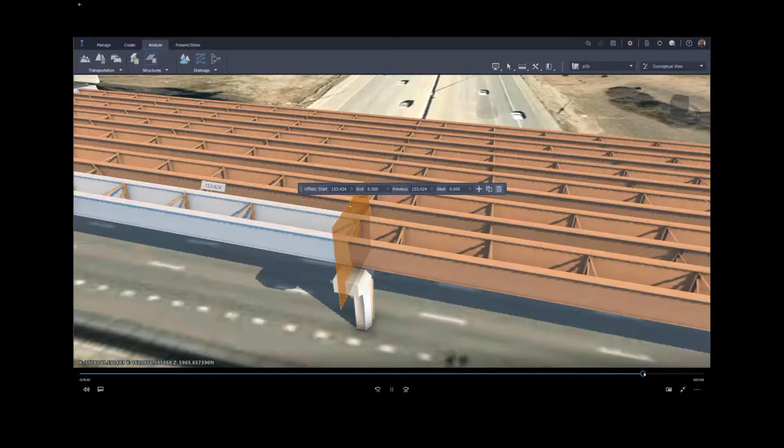One last couple of things. When you're here, what if you wanted to say, well, I want to make this variable depth. So I can select any girder, and these yellow or orange slices give you the parameters at this specific location. You can add additional slices and maybe change this to a 10-foot depth. And as you do this, all the cross frame geometry will dynamically update, so it will reflect the new variable depth girders. You might want to have a flat segment, so you're adding another slice there.

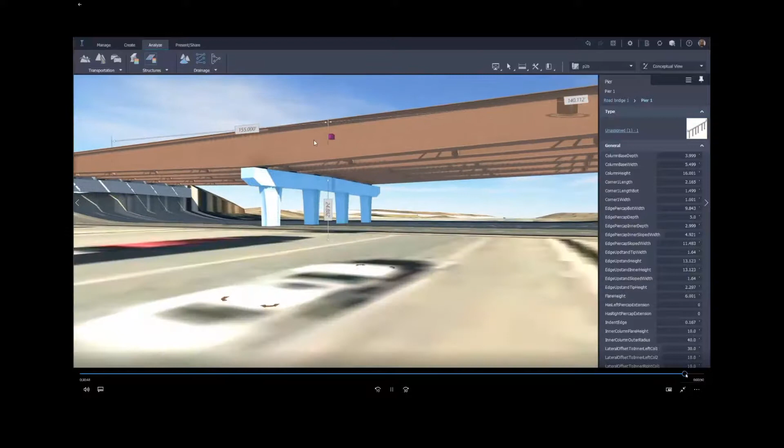So this is the spirit of really interacting with the bridge dynamically, and assigning those to the other girders. And then in a few minutes, you have another variation that is variable depth, and you might decide to rerun the grillage or the FE model. You might decide to update the Revit model, depending on where you are in the evolution of your concept. So that's what I wanted to show today.

I think we're at the bottom of the hour here, but hopefully it gives everyone on the call a better understanding of what a connected workflow is, how road design, rail design, bridge design, and documentation work together, how you can iterate together, how you don't have to do all that rework, and how the increased level of detail is coming to the bridges, starting with the bearings and cross frames next month. And there are other complexities coming, I think, in the coming releases.

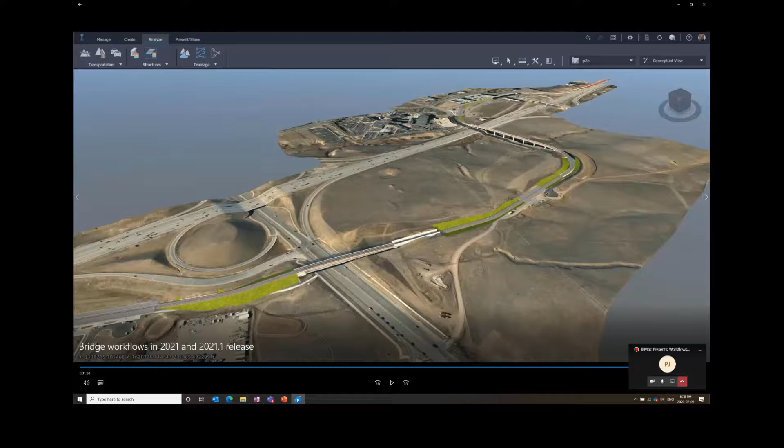I actually do have a couple questions. First of all, this is mainly for bridge design, but let's say we have designed something like a rail system where you have a station located at an elevated guideway situation. How easy is it to integrate building design coming in from Revit along with a bridge design? Let me pull up an example here.

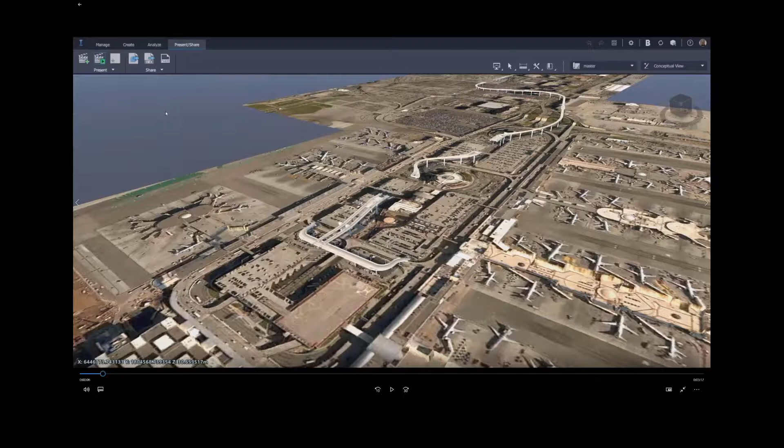In this case, the alignments were all in Civil 3D. All the parametric bridges were done in InfraWorks, obviously leveraging Inventor parametrics. It was very important that the alignment was the datum for the project, and the geometry where these guideways interact with the buildings had to be exact, right? So when we published the bridge to Revit, they were also bringing in the Revit buildings and stations in the Revit model.

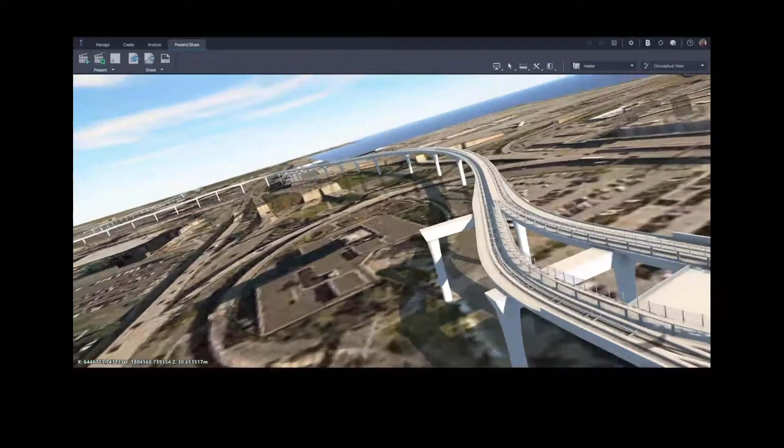You can see at a glance the level of detail in the InfraWorks model for the parametric guideway, but the gaps are where the buildings are. They also have a federated model in Navisworks for clash detection and so on, so everything also ended up there. So it's a combination. You can bring it into InfraWorks, but the precision layout that you have for these guideways works very well with Revit.

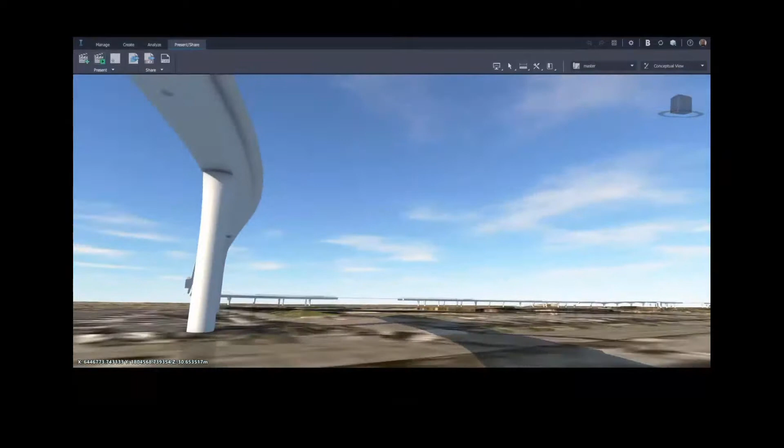You're going to make sure the coordinate systems and shared coordinate systems are compatible. In this case, the difference in spot elevation between Civil 3D, InfraWorks, and Revit was within, I think, 1 millimeter or something. And they had a pretty high requirement for that precision. Does this give you a sense of it? Yeah, I think so.

My other question was actually involving GIS data. I noticed that there's the ArcGIS integration. You can export to file geodatabases. Is it possible to import data from ArcGIS file geodatabases, or is it mainly through shapefiles and the online portal?

Yeah, that's not my domain of expertise. I know there's a lot of effort with ArcGIS and the Esri portals. You could send some questions to Laura and myself, and I can check with my colleagues that work in that domain. I've been using the vanilla Model Builder here, but our clients often have their own ArcGIS portals with much richer data that you can bring in. And you can also, I think, publish to your ArcGIS, but I'd have to confer with my colleagues who specialize in that. Okay, thank you.

Any other questions from anyone else? I hope it makes sense. I hope you can all go out and give it a try. We're putting a lot of effort in. There's still more coming. This is where we are today, and there's more refinements coming for tunnels.

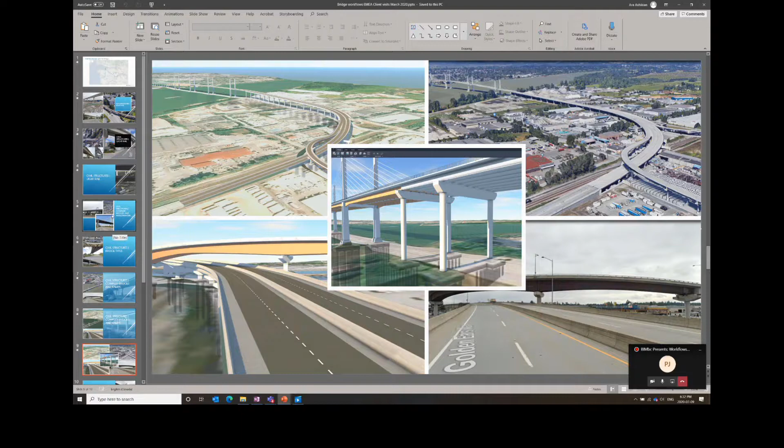So lots of refinements. A lot of this you can do today. There are just improvements and simplifications coming, so it's easier to do. We're adding more content, so out of the box you have richer content. So that's what I wanted to show today.

That's great. Well, I think if nobody has any more questions, somebody's typing, so. Okay, no, I guess no more questions.

One more comment. We are working, and this is BC after all, with buildingSMART. We are working closely with a number of IFC initiatives, so IFC 4x3, 5.0. There's a lot of momentum finally going in that direction. So that's another aspect where we want to be at the forefront, to have an open ecosystem.